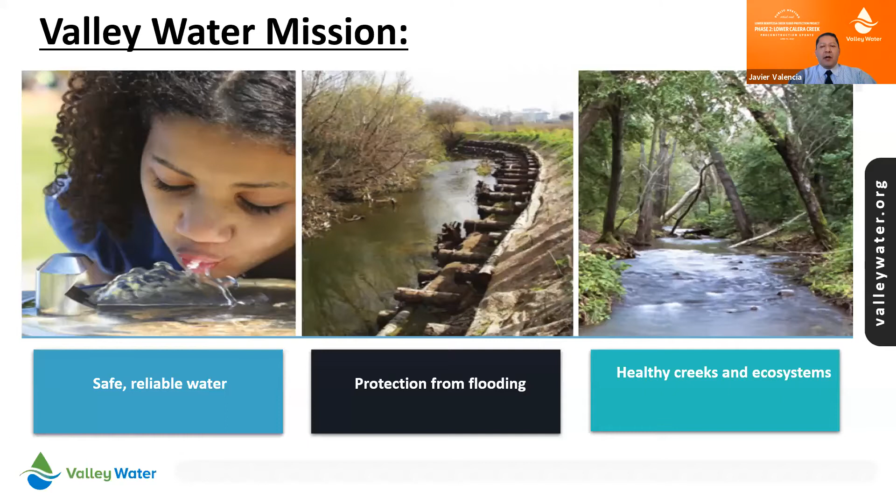Valley Water level of service: Valley Water serves over 2 million people in Santa Clara County, 15 cities, 12 water retailers, and 4,700 direct well owners.

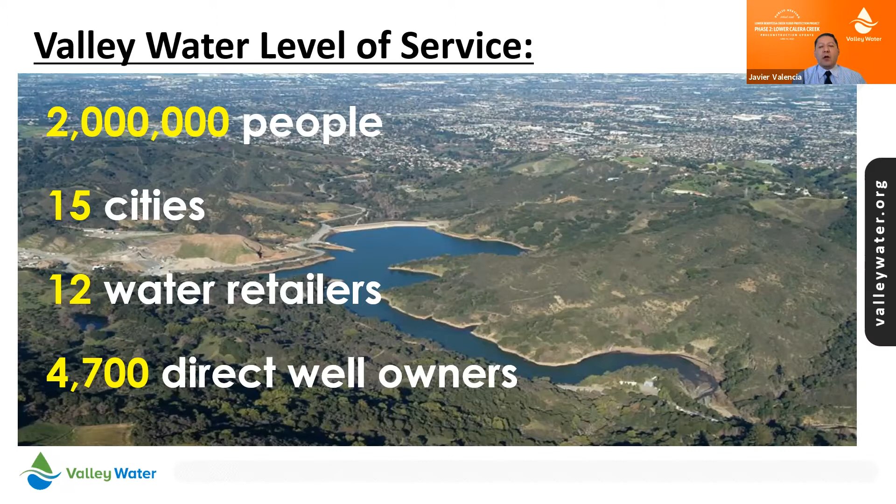Now, the project objectives and background of the Lower Calera Creek project: to provide flood protection from the 100-year flood event, meet the Federal Emergency Management Agency, known as FEMA, freeboard requirements for flood protection elements. Another objective is to improve maintenance access, just in case there's some maintenance emergency - this project will provide that access at the end of construction.

Also, to minimize the need for seasonal removal of sediment and vegetation - Valley Water's objective is to have a self-sustained creek that requires minimum maintenance. Another objective of the project is to improve biological conditions with mitigation planting. As with every construction project managed by Valley Water, there is always mitigation planting. This is required by the regulatory agencies, and all the plants that are going to be planted are natives of the area. Lastly, another project objective is to improve trail access in the area.

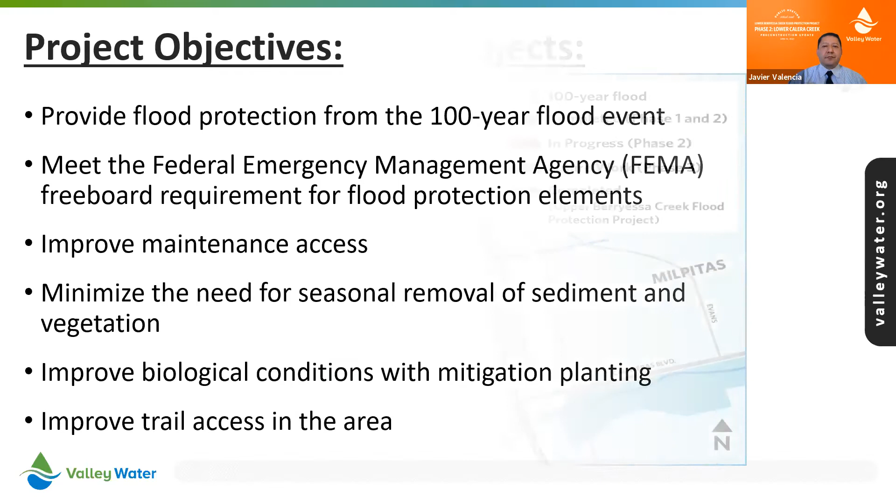Now on this one, this is the map of the Milpitas area. As you can see over here on the pointer, we have the Lower Calera Creek project, which basically extends from the junction of the Berryessa Creek all the way to upstream of Arizona Avenue to the existing drop structure.

For the future, well, let me tell you, the Berryessa Creek project was completed in 2018, but one of the elements we're going to be constructing as part of the Lower Calera Creek project is a trail pavement, which I'm going to talk about in a little while. Going back to the map, the future project is also on Calera Creek from the existing drop structure all the way upstream of Highway 680, and also includes the Tularcitos Creek. That's going to be for the future work.

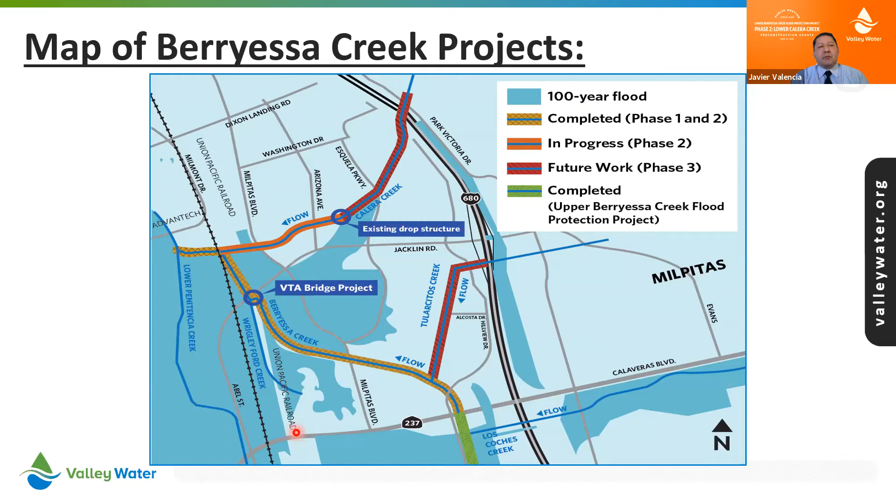As you can see on the map, the shaded blue area is the 100-year flood area, which obviously after all this is completed, Valley Water's objective is to remove all the flooding area.

This is a close-up map of the Lower Calera Creek. As I told you before, this is the junction, those are the limits. We divided the project into Reach A and Reach B. Reach A is from the junction of the Berryessa Creek project to North Milpitas Boulevard, and from North Milpitas Boulevard to upstream of Arizona Avenue, that's going to be Reach B. So you can see again, this is the 100-year flood zone.

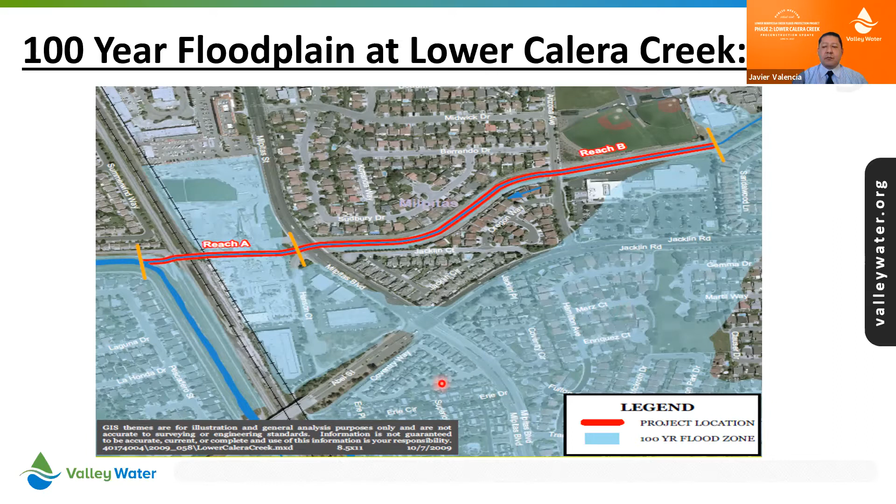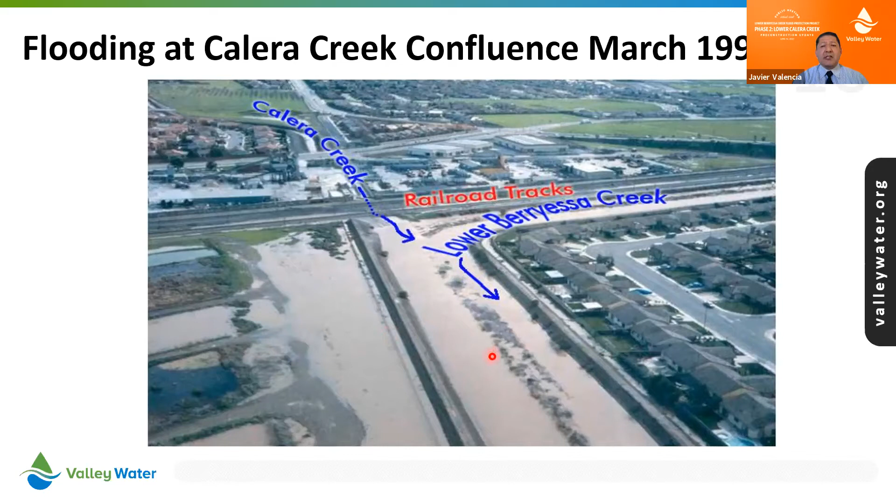Speaking of flooding, let me show you a picture. This flood event happened in March of 1998. This is the junction of the Lower Berryessa Creek and Calera Creek, and this part is North Milpitas Boulevard. So the objective is to minimize this kind of flooding in the future.

Now let me talk about the project elements and what to expect during construction. For the flood protection elements, what is going to be constructed is a concrete U-frame between VTA BART Railroad and North Milpitas Boulevard.

We're going to be building head walls at the bridges of North Milpitas Boulevard and Arizona Avenue, but these head walls are going to be separated from the bridges. We're going to be building 11 flood walls for the whole project, and also install an asphalt trail on the levee maintenance road along Lower Berryessa Creek.

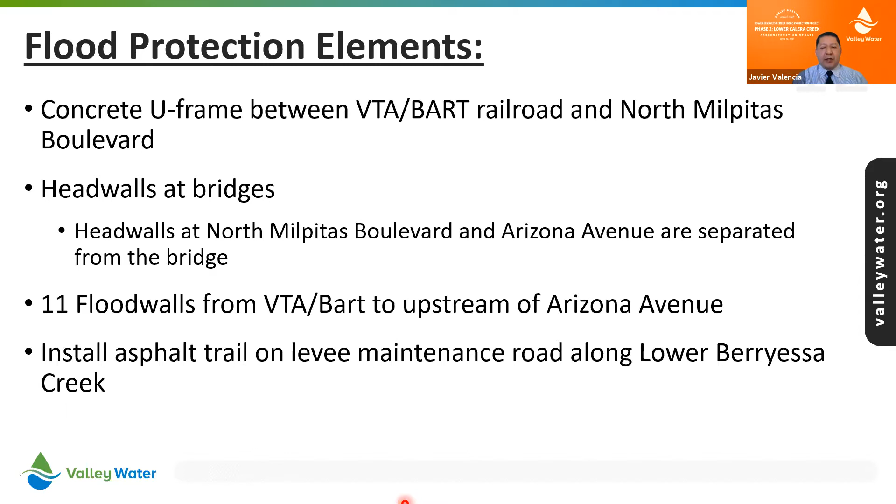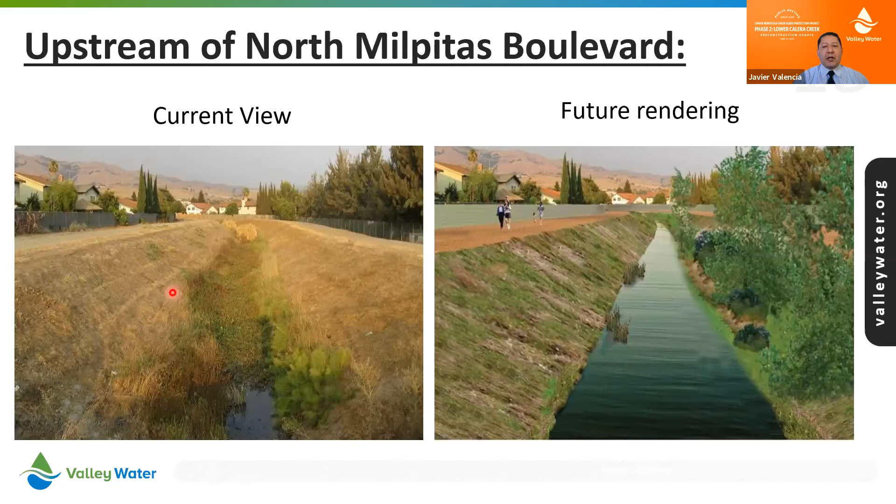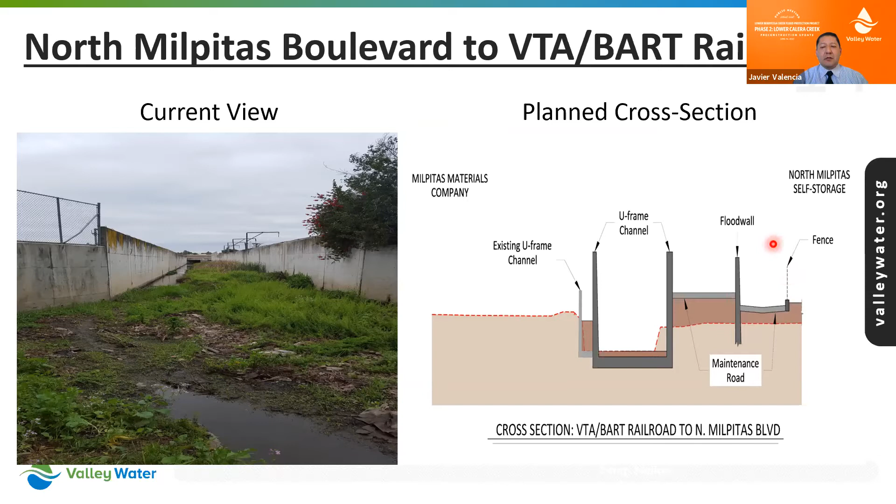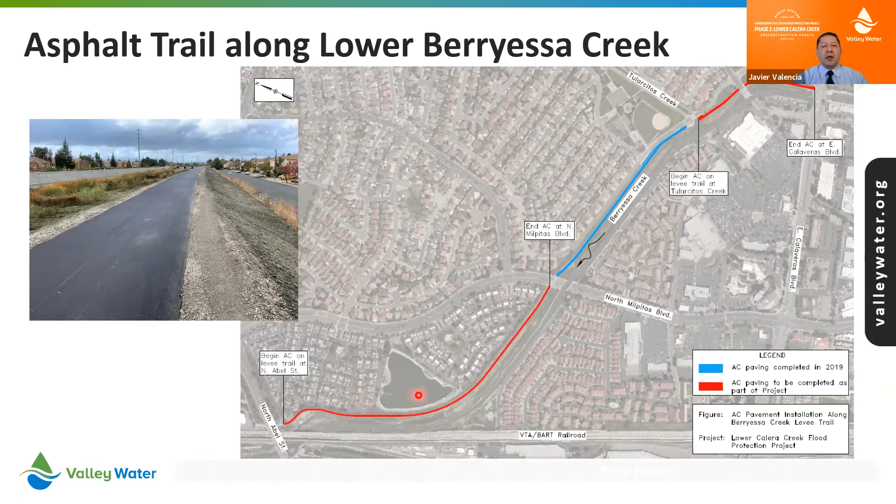Now, in regards to the asphalt trail along Lower Berryessa Creek, this is the map where the asphalt is going to take place. This is Berryessa Creek, and the asphalt is going to happen from North Abel Street to North Milpitas Boulevard, and from Tularcitos Creek to East Calaveras Boulevard. On your left side, there's a picture showing some sections on the Berryessa Creek where you can see the AC pavement, the asphalt trail, and that's the future conditions that is going to be after we install the asphalt.

What to expect during construction? Well, the trail is going to be closed temporarily.

Valley Water will notify the community regarding the closure. As of this moment, we don't have the schedule from the contractor, but as soon as it's available to Valley Water, we are going to communicate it to the community.

The construction work is going to be only Monday through Friday from 7 a.m. to 7 p.m. Hauling trucks will not be allowed before the start of the schedule, which means before 7 o'clock we are not allowing any trucks.

Our contractor is not allowed to park on residential streets or block anybody's entrance. There will be heavy equipment, dust, vibration, and noise because it is a construction site.

For the noise and traffic control measures, Valley Water is taking some measures to basically minimize those impacts. If weekend work is needed, notification will be sent to inform the community.

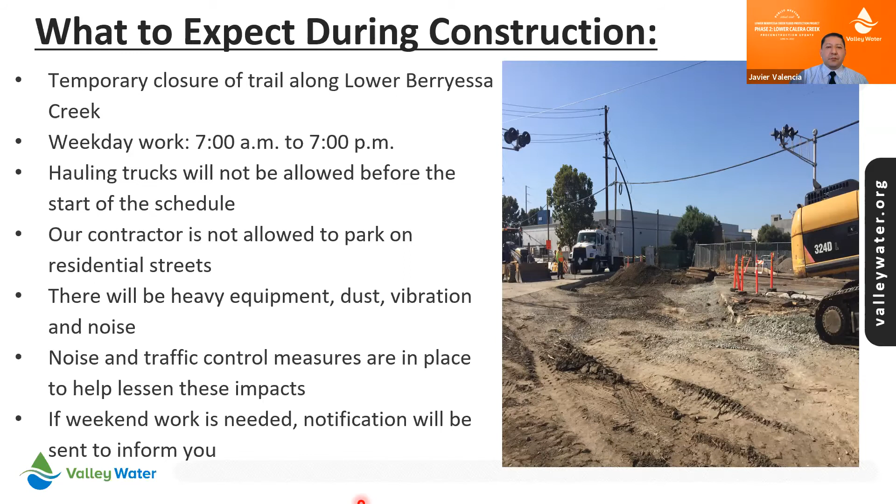Now for the construction access points, we have 7 access points. On North Milpitas Boulevard and Hanson Court, we have 3 access points for the construction site.

Downstream from North Milpitas Boulevard, this is the existing concrete U-frame channel, and this is Milpitas material. We're going to have an access here.

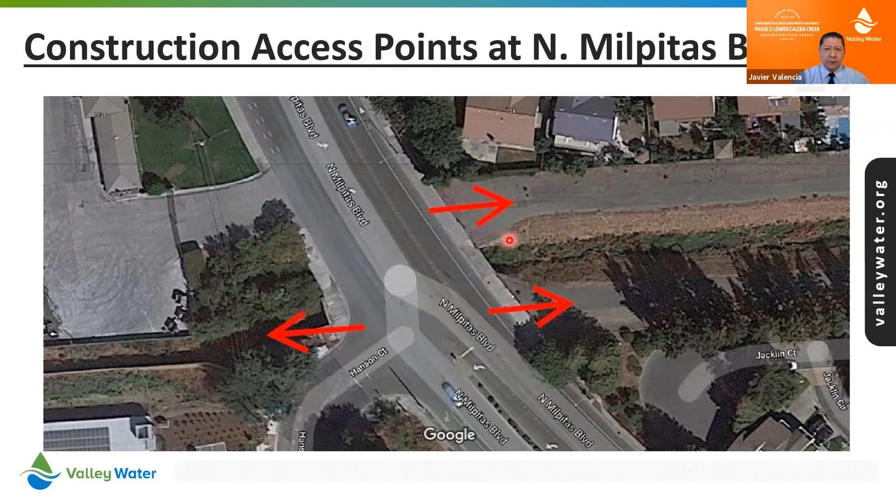Upstream of North Milpitas Boulevard, we have access on both sides of the creek. Same thing with Arizona Avenue — we have 4 access points to the construction site.

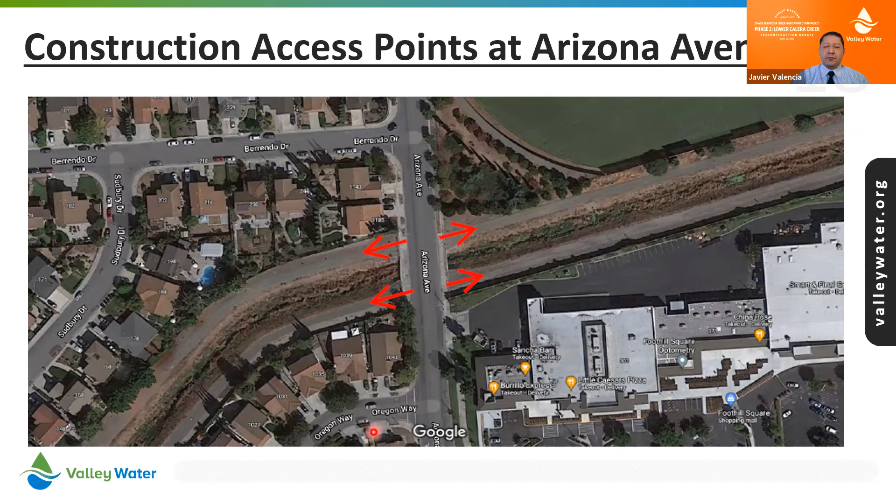Now, we're going to have some tree removal, but the trees that are going to be removed are non-natives of the area. At the corner of Hanson Court and North Milpitas Boulevard, there are 4 trees that are going to be removed, and 2 trees are going to be removed along Jacklin Court.

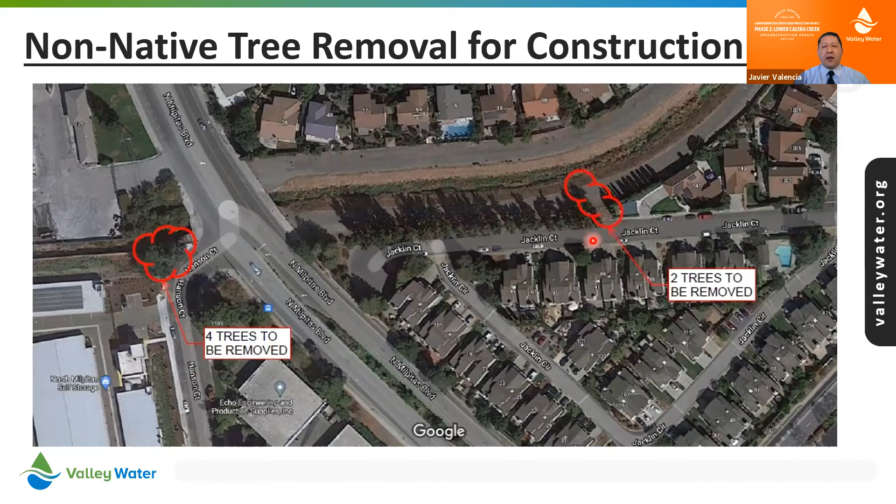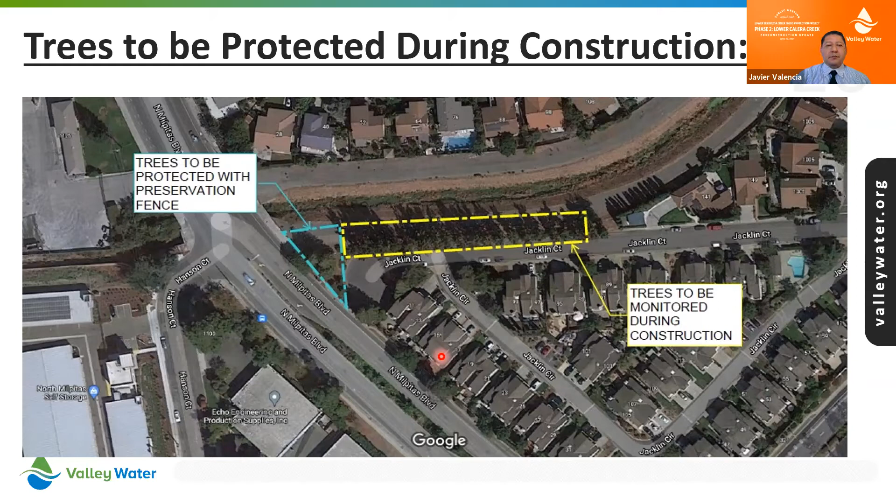The pre-construction and post-construction surveys, before and after construction. Homeowners that provide permission to enter — we have 3 property owners. Basically, Valley Water and the contractor's inspector will take notes, photos, and videos of homes, streets, and sidewalks to document everything before and after construction. This is a common practice with any construction project.

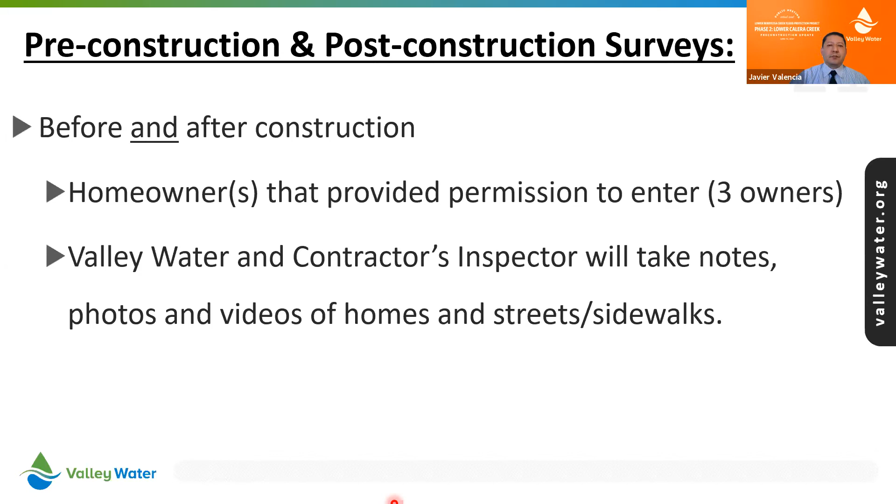Now the schedule for the project. The construction contract was awarded on May 25th, 2021. The notice to begin work was issued June 15th. Now the pre-construction public meeting is today, June 15th.

There are 2 years to complete this work. The civil and landscape construction of the project is expected to be finished by December 2022. After that, there is going to be a 3-year planting establishment and maintenance period, which will be completed by December 2025.

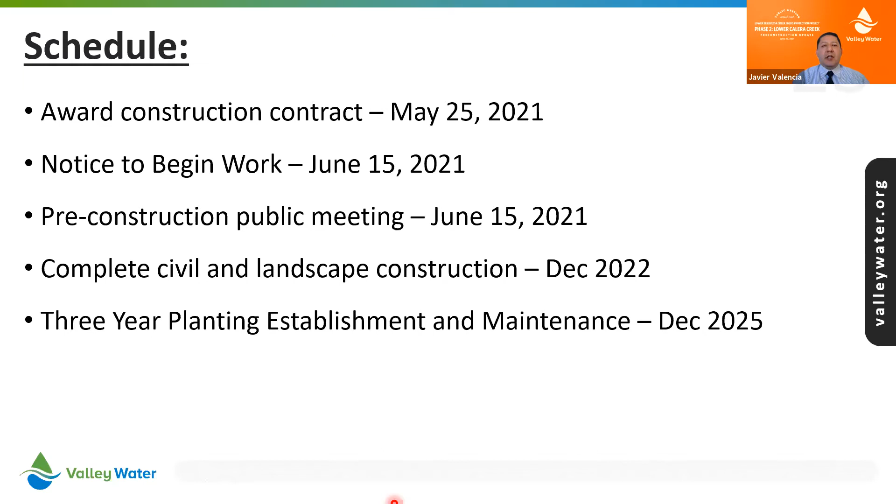Neighborhood communications. We have direct contacts, Carl Newman and Jose Villarreal, who will be providing the community periodic project updates through direct mail and social media.

We're going to have 2 project signs at the site with QR codes, so basically you can scan the code and get more information.

There is a phone number where you can contact us, and you can email Valley Water with any questions you may have.